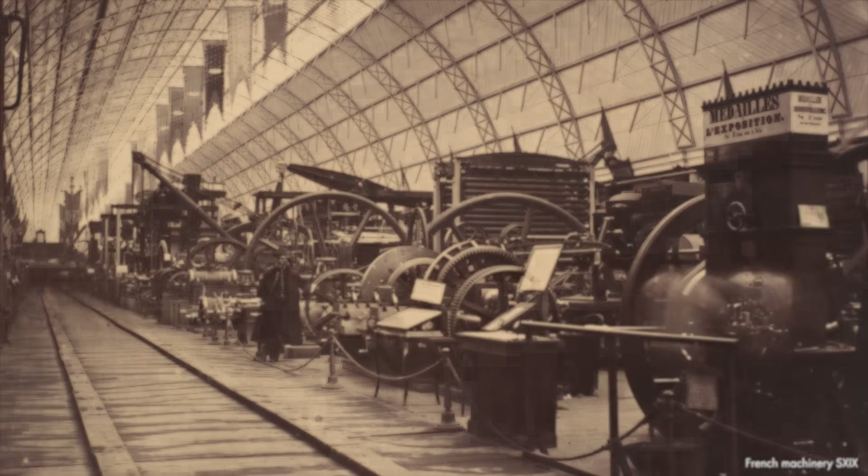And now back to the lost transatlantic steamships. Throughout the majority of history, crossing the Atlantic Ocean was nearly an impossible task, as the Americas seemed to be forever separated from Eurasia. Then, when Europeans developed ships powerful enough to survive the journey, the continents would be bridged. However, trips from one side of the ocean to the other would take an extremely long time and be very dangerous. This would all change with the advent of the Industrial Revolution and the entry into the modern era, where new technologies would pull the continents even closer.

This new time period fostered advancements in many avenues, and one example saw humans harness the power of steam, which was previously thought to be an impossible task, involving abstract concepts such as air vacuums and displaced matter. But soon enough, steam engines were created, and it was only a matter of time before these same engines would be fitted onto ships and sent across the Atlantic.

These new transatlantic steamships reigned king of the ocean from the 19th century all the way up until the Second World War. They also permanently changed the course of history, leaving drastic alterations in trade, immigration, naval warfare, and humanity in general. While the steamships replaced the obsolete sailing ships, soon new technologies came in and replaced the steamships themselves, with advanced aircraft becoming even faster and more efficient.

But in order to get a more holistic view of the impact that transatlantic steamships had on history, I'd like to present you with several prominent examples of individual ships and paint a full picture of their story, and hopefully find out what remains of them today. The first ship we look at is the SS Savannah, which navigated the oceans around 200 years ago.

But on May the 24th, 1819, history would be made as the Savannah set sail for Liverpool, England, looking to be the first steamship to cross the Atlantic Ocean. Success was so unlikely that no passenger or cargo were taken, just the brave, ambitious crew. Then, after 29.5 nerve-wracking days, which saw the crew overcome several technical issues, the Savannah docked in Liverpool, completing the extraordinary journey which very few actually thought was possible.

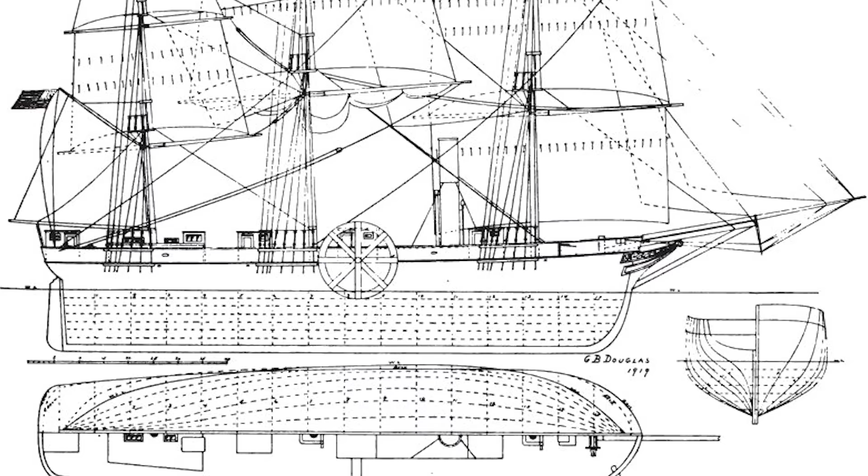Well, unfortunately, in 1821, the Savannah ran aground at Long Island, New York, and broke apart upon impact. Some pieces of the ship have been recovered and restored, but most was lost. Now all that remains are small fragments, such as the canvas from the original sail, as well as the logbook which had the records of its voyages, including that famous trip across the Atlantic to Liverpool.

Now, in 2016, a man from Long Island named Thomas Schultz claimed to have discovered where the remnants of the Savannah lie. By studying the bay and discovering pieces of washed up wood and metal, Schultz concluded that the Savannah is buried underneath the sand.

He has contacted the state about it, but since the bay is federally owned, it's up to the National Park Service to excavate the area, and they have yet to do so, which would suggest that the SS Savannah has very much been lost to time, which is something that Schultz had directly warned authorities about. You see, the tide will wash away sand, pulling the remnants into the ocean, only to be lost forever.

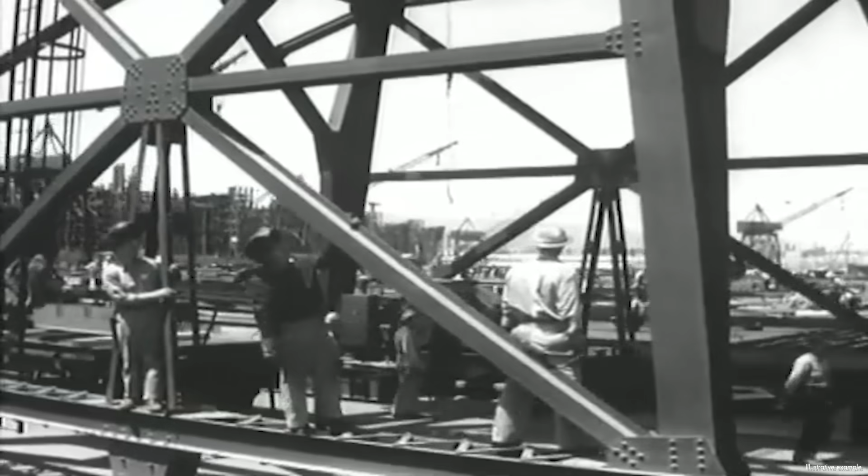After the Savannah proved that transatlantic travel was possible, the shipbuilding technology then gradually adapted to develop newer and faster models. One such example was the SS Great Western. This steamship was designed by Isambard Kingdom Brunel, who was a famous British engineer known for creating a lot of iconic Victorian-era infrastructure. He then decided to venture into shipbuilding, and the Great Western was his first.

Upon completion in 1838, the ship was 1,320 tons, 212 feet long, and could hold up to 148 passengers, far larger than older steamboats. However, the Great Western did use paddle wheels rather than a screw propeller, which was not common just yet. It was also constructed as an ironclad wooden ship and had 4 sails along with its 2 steam engines.

On April the 8th, 1838, the Great Western set out for its first voyage from Bristol, England to New York City in just 15 days, which was nearly twice as fast as the rest of the transatlantic ships at the time, making it the fastest steamship in the world. Over the next 8 years, the Great Western embarked on many trips across the Atlantic, tallying 45 in total.

But in 1853, the Crimean War broke out, with the British Empire siding with France to join on behalf of the Ottomans against Russia, in a conflict that fought over religious rights for citizens in the Ottoman territory. By the first year of the war, the Great Western was repurposed into a troop transport and sent British soldiers across the Mediterranean and Black Sea to Crimea.

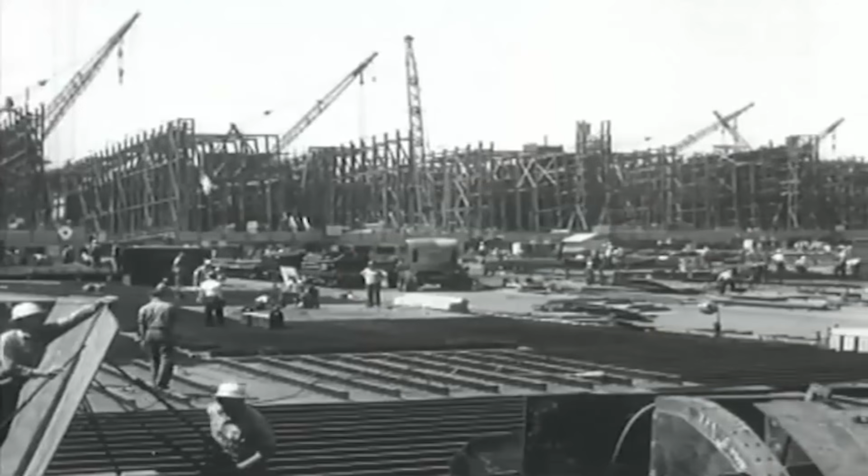As the transatlantic steamship market expanded exponentially, it soon became a competition for who could build the biggest and most daunting ship. Accordingly, in 1840, the British and American Steam Navigation Company finished the SS President, a massive ship that was 2,350 tons, 243 feet long, with a beam of 41 feet, making it the largest ship in the world in the early 1840s. While the ship was immense and beautifully designed from an aesthetic point of view, it seemed as if the engineers put more thought into how to make it as large and visually stunning as possible, instead of making it efficient or safe.

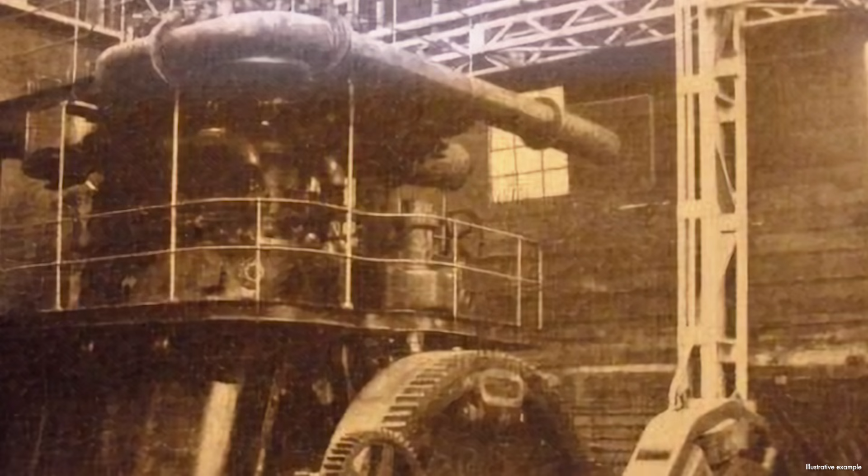And this came at a price. For example, the ship was designed to have 2 decks, but a third, which included a huge salon, was haphazardly added. The President also did not have engines strong enough to carry all of the weight, and the paddle wheels were in constant need of repair. And it gets worse: the ship was often given more cargo than was probably safe, and as a result, slow voyage times were a continuous criticism.

In its first year of service, the President would face a disaster in March of 1841. After boarding a trip from New York to Liverpool, it never arrived at its destination. The disappearance of the President was shocking to the British public, with even Queen Victoria herself taking an interest in the search for the ship. But after months of searching, nothing was found, and it was declared lost. The embarrassment of this catastrophe eventually led to the British and American Steam Navigation Company going out of business.

And here's where things get mysterious. While the official last sighting of the President was when it left port at New York on its way to Liverpool in March of 1841, it's possible that it was spotted in July of 1841 by a Spanish ship returning to Spain from Savannah. The captain identified a ship in the distance which he initially thought was a rock, but after approaching closer, they discovered a wreck and boarded it. The crew figured out that this was a steamship, and with later analysis of their description, it suggested that this wreck may have been the President, given the similar paint coating and number of boilers.

They had realized that this ship had been heavily damaged in a fire, and certain parts of the ship were completely unrecognizable. While they investigated, they were unable to find any surviving items which could definitively identify the ship, such as papers, documents, or letters. So if this wreck was in fact the President, then that means a massive fire saw its demise. What remains of the crew is yet another mystery within itself, most likely a mystery known only to their ghosts.

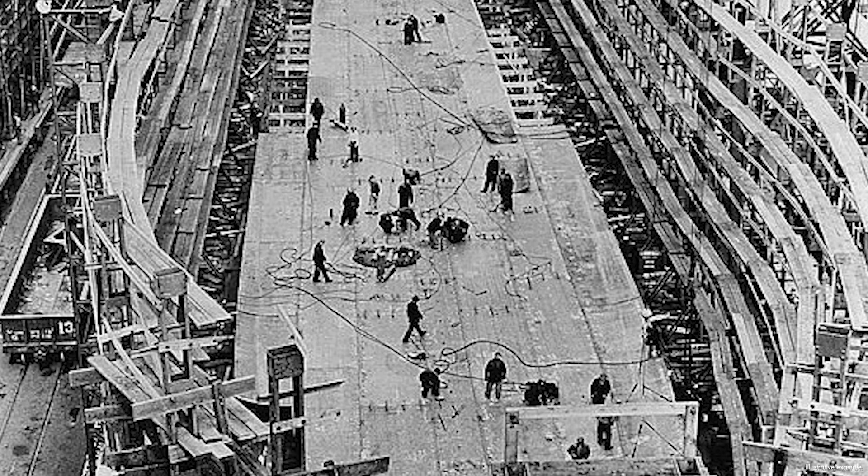Originally, it was planned to serve under the Eastern Steam Navigation Company for travel and trade with India just at the start of British colonization, but it was eventually given to the Great Ship Company before construction was completed. Then, when it was launched, the Great Eastern traveled on the New York line for 6 years, but there were complications. The ship was often too large and inefficient, unable to fit most ports, so ultimately it was sold to the Great Eastern Steamship Company, where it was repurposed into a cable vessel, performing the hard task of laying cables across the Atlantic Ocean.

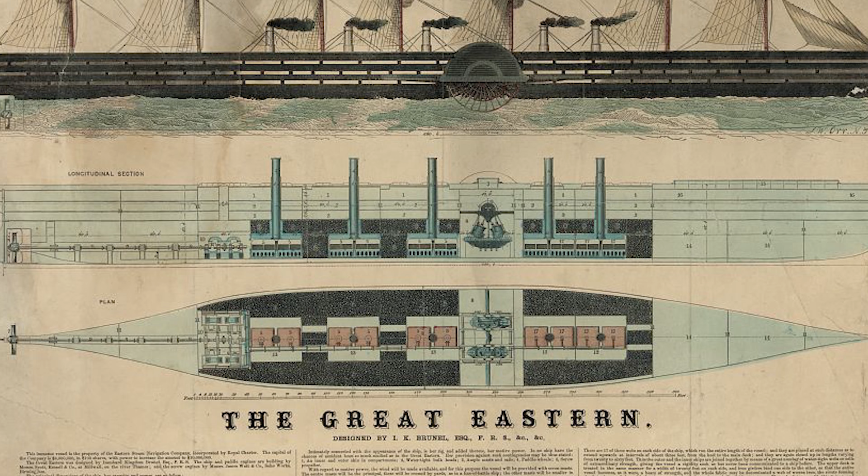The Great Eastern became the first ship to lay a continuous transatlantic telegraph cable. By 1872, though, the Great Eastern became obsolete as specific ships for cable laying were developed, and it was retired. After 12 years of inactivity, the Liverpool department store Lewis bought the ship and turned it into a music hall and coastal billboard. Finally, in 1889, the Great Eastern was sent to the River Mersey, where it was broken up. Given the ship's fantastic size, it took 2 years to disable it completely, and a wrecking ball was required.

But here's the cool part: valuable pieces such as furniture, lights, and lamps were sold to collectors or people who had a personal connection to the ship, like the former crew. While parts of the hull were unable to be recycled, a lot of the wood paneling was turned into a bar, while the deck's caboose was given to a Lancashire school to be used as a playground.

Furthermore, Liverpool FC, the biggest soccer team in the city, purchased the top mast from the Great Eastern and used it as a flagpole outside their famous stadium, where it still stands today.

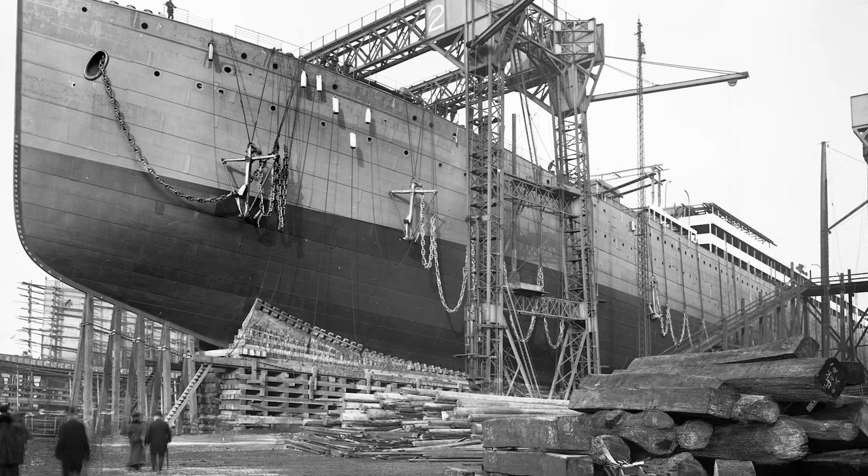As more steamships crossed the Atlantic, production became more refined, reflected by the SS Baltic. Weighing 3,707 tons and measuring 420 feet long by 40 feet wide, the Baltic was originally called the Pacific, and was built in Belfast, UK by the Harland and Wolff shipyard. In 1871, after construction was finished, it was renamed and given to the White Star Line, a brand new company at the time.

The Baltic was known for its state-of-the-art passenger accommodations with high-quality saloons, smoking areas, and sleeping rooms. In September of that year, it made its first voyage across the Atlantic, arriving in New York City from Liverpool. Two years later, she won the Blue Riband for breaking the world record for the fastest trip between Liverpool and Queenstown, Ireland.

In 1888, the Baltic was bought by a Dutch transatlantic company called the Holland America Line, and the ship was renamed the Veendam. Following a decade of transporting European immigrants to America, the Veendam accidentally collided with a wrecked ship in the North Atlantic in 1898, and it sank, but luckily all the passengers were saved.

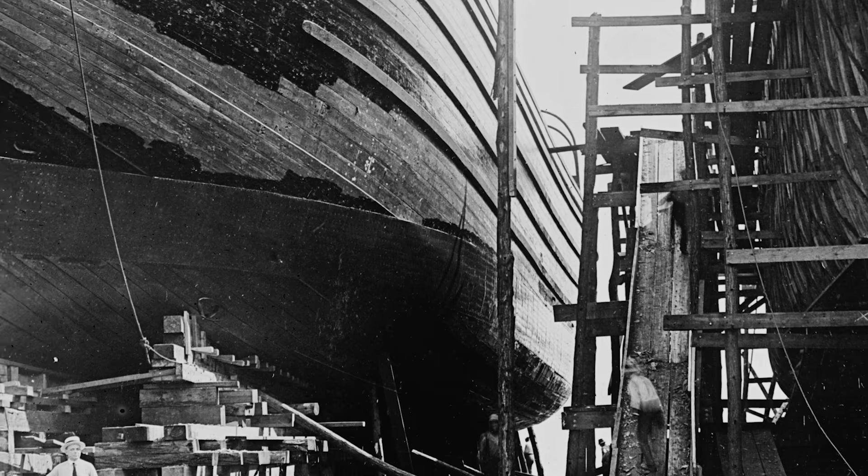This situation is not as unusual as you might think. At a time when wooden ships were still widespread, it was a common danger to come across abandoned and wrecked ships that were not fully submerged in the sea. This was because wood is buoyant, and part of a sunken ship would sometimes remain floating in the water.

To prevent the Baltic from becoming a hazard herself, the crew actually set fire to the ship, and it now sits at the bottom of the North Atlantic.

The SS Adriatic was a sister ship to the SS Baltic, and while they shared many stylistic similarities, they eventually would go on to have very different stories. This ship was also built in Belfast by Harland and Wolff in 1871 before being given to White Star Line. The SS Adriatic was actually built alongside the Baltic.

The Adriatic weighed 3,888 tons and measured 437 feet long by 40 feet wide. Besides the floor and furniture, it was made completely out of iron. It could also hold up to 1,150 passengers, and similar to the Baltic, it had saloons, smoking rooms, and even barbershops. These ships were built following the recent success of White Star's first 4 steamships, when the transatlantic travel market was becoming extremely lucrative.

The Adriatic made its first voyage in April of 1872 from Liverpool to New York City. Through its tenure, she would be caught in multiple accidents, most of which the Adriatic was at fault for. For example, in 1874, the Adriatic slightly grazed the Parthia, but then the next year she collided with the Columbus, a British schooner, causing it to sink.

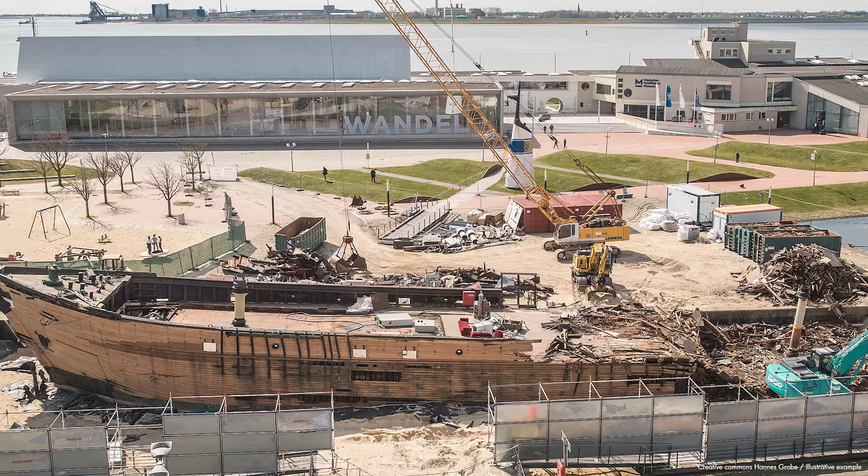But after nearly 3 decades of service, the Adriatic became too obsolete, and in 1899 it was broken up in Preston, England, with its parts being sold for scrap.

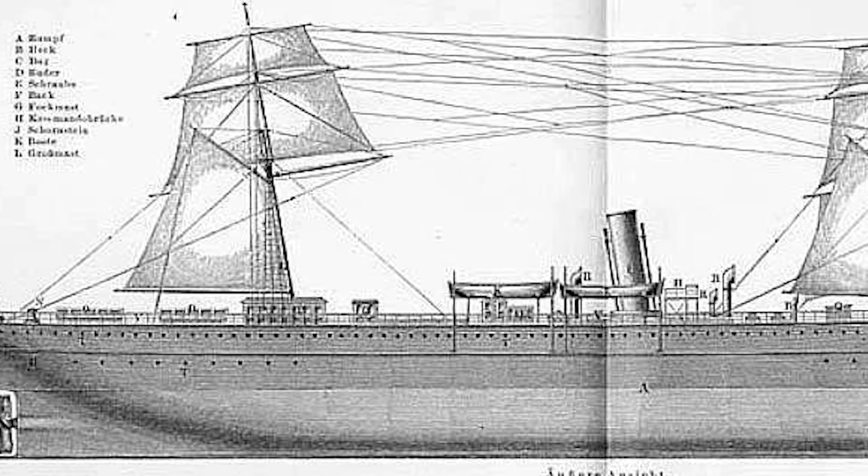The next ship we'll look at is the transatlantic passenger ship titled SS Frisia, originally called the Alsatia. She was built in 1872 by a Scottish shipping company before going to the Hamburg-Havre-New York line. Much larger than older steamboats, this ship was 364 feet long by 40 feet wide and weighed 3,500 tons. It could hold up to 820 passengers, and as steel ship hulls were becoming much more common, the Frisia remained one of the few iron ships still in use at the time.

On August 21st, 1872, the Frisia made its first journey from Hamburg to New York in just 11 days. In these early years of service, the Frisia carried many immigrants from Europe to the USA, especially those fleeing religious persecution, overpopulation, crop failure in their homeland, or just seeking economic opportunities and freedom in the United States.

One such story is from 1876, when 70 Russian immigrants traveled from their hometown in Kratzke to Hamburg, Germany, to board the Frisia. They arrived in New York City before heading to Russell County in Kansas for the valuable farmland. Alongside many German immigrant families, they formed the Bender Hill community, which still stands today.

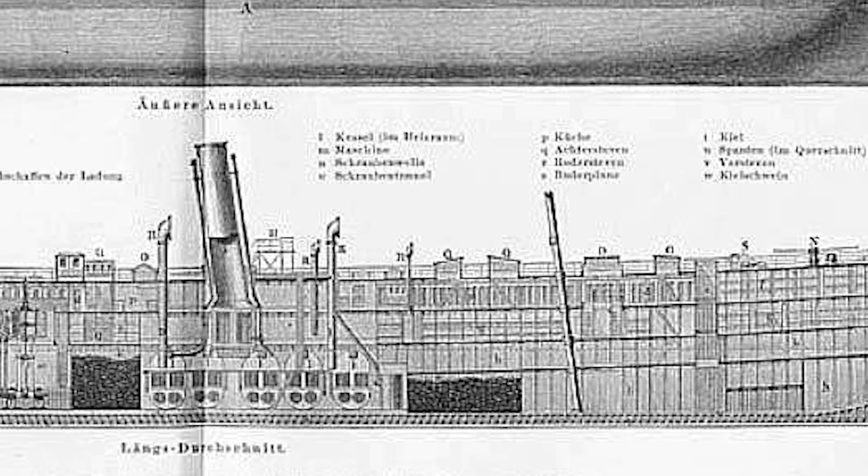After nearly a decade and a half of transporting immigrants to the US, the Frisia was sold to a British company before ultimately being sold to an Italian company only 4 years later. The Frisia was renamed, and under new management, she still operated along transatlantic trade routes, which was natural as she was administered by the NGI, a large Italian shipping company with routes in the Mediterranean.

NGI also sent materials back and forth between Italy and South America. After 12 years of transporting raw materials like coal between Italy and South American nations, she became so old that she could no longer handle transatlantic trade or sea trade of any type. The ship was then coal-hulked, meaning that since it could no longer sail, it was just used to store coal.

Then, in 1902, she was officially scrapped. It's not known what happened to the remnants after scrapping, but one can speculate that its fate was similar to that of the SS Silesia, a ship built by the same firm and operated under the Hamburg American line before running aground. It was then scrapped, and the metal from its hull was sold.

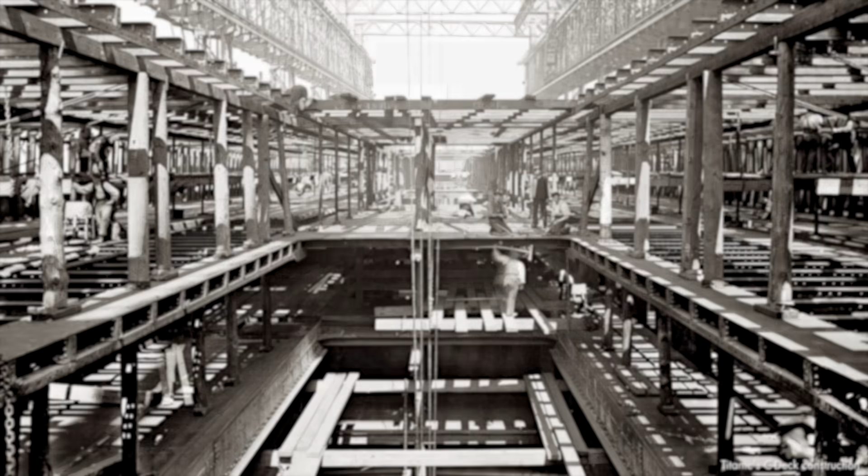The most well-known entry on our list is the Royal Mail ship Titanic, a British transatlantic passenger ship. With construction beginning in 1909 and finishing in 1911, the Titanic was commissioned during the height of popularity for transatlantic passenger trade, with both immigrants and travelers looking to head across the Atlantic Ocean. At the time, the two most successful lines were Cunard and White Star.

Cunard developed two groundbreaking ships, the Mauretania and the Lusitania. In order to keep up with competition, White Star responded with the construction of three ships: the Britannic and the two sister ships, the Olympic and the Titanic.

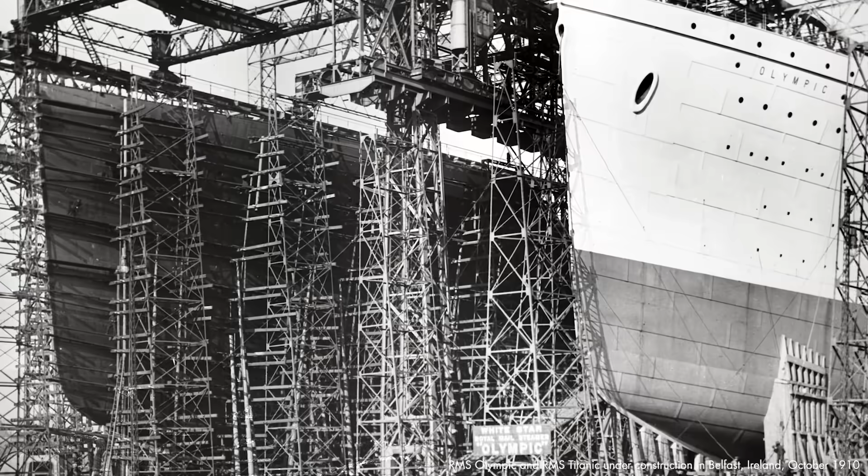The Titanic itself was an architectural masterpiece that contained revolutionary amenities such as elevators, a swimming pool, a massive dining saloon, parlor lounges, and gymnasiums. The general decor of the ship was also simply masterful, with long wooden staircases, statues, and custom finish lining the halls. This ship was pleasant for almost all of its passengers, not just the first class, as the second and third class passengers were given better quarters than other comparable ships at the time.

Overall, the Titanic was also a massive ship, weighing up to 52,000 tons and measuring 882 feet long by 92 feet wide. On April 10th, 1912, almost exactly 110 years ago today, the Titanic set sail on its very first voyage from Southampton, England to New York City. Many prominent passengers were aboard, including socialites, moguls, and even the famous captain of the ship, Edward J. Smith.

4 days later, though, the Titanic traversed an area known for icebergs, but a breakdown in communication and oversight from the radio operators meant that Captain Smith did not know he was heading into a dangerous ice field. The lookouts were unable to spot a massive iceberg in the Titanic's path, and the ship turned too late, with the iceberg scraping the starboard.

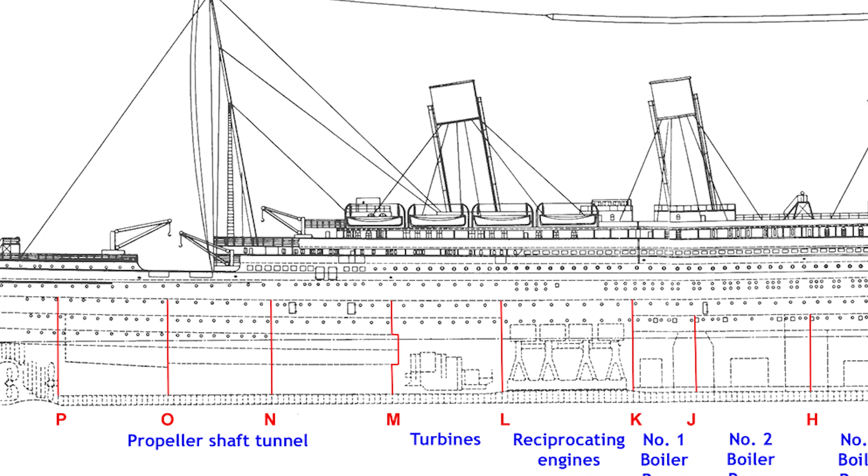Now let me emphasize, this ship was not meant to sink. You see, the Titanic was built as a ship separated into 16 compartments. This was a safety feature intended to prevent sinking if the hull was punctured, as when one compartment filled with water, all the others could be closed off. Because of this, many claimed that the Titanic was unsinkable.

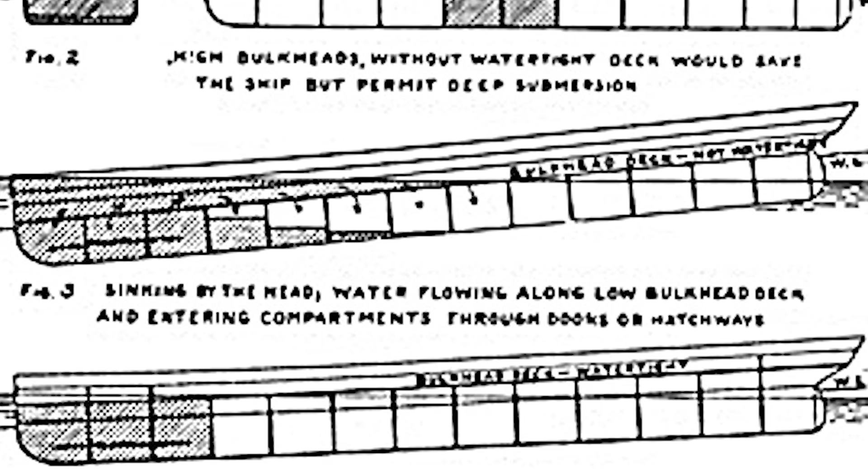However, upon scraping this iceberg, 5 compartments were pierced, and as they all filled with water, the ship tilted, causing water to overflow into the surrounding compartments as well. Immediately, the ship started sinking and distress signals were sent out, but the closest ship was 3 hours away. This, coupled with the fact that the Titanic did not have enough lifeboats, meant that many were doomed.

As the famous James Cameron movie depicted, the situation quickly devolved into chaos, and musicians tried to calm the passengers by playing, but they too would perish. The bow completely filled with water and sank, first causing the stern to emerge out of the water in a seesaw-like action. The weight of the stern was too much to handle, and the entire ship split in two, with both sections turning downwards and plummeting to the ocean floor.

By the time the nearest ship, the Carpathia, came and rescued the survivors, only 705 people lived, and over 1,500 died. The tragedy was heavily publicized due to its truly shocking nature, and multiple investigations were held. The ship remained completely lost at sea until 1985, when an American and French dual expeditionary force operating with the US Navy discovered the ruins of the Titanic using a remote-controlled underwater camera.

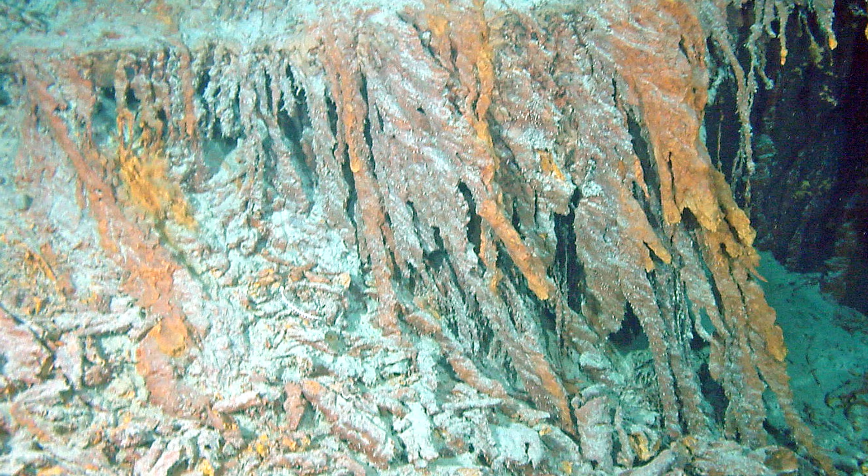They discovered both halves of the ship still laying upright, but now rooted in sand. As recent as 2019, iron-eating microorganisms have done so much damage to the Titanic that it's almost unrecognizable.

Luckily, through many diving trips, numerous smaller artifacts and novelties have been saved, such as menus from the dining saloon, the instruments and sheet music from the musicians who tried to calm the crowd, and even some jewelry left behind by passengers. And while the ocean eats away at the ship little by little each year, the Titanic lives on in the public mind through popular media.

Hailing from the aforementioned Cunard Line, the RMS Lusitania was built from 1904 to 1907, and upon its completion, it was the largest ship in the world, weighing nearly 32,000 tons with a length of 787 feet. She also became world-renowned for her speed, breaking the record for the fastest trip across the Atlantic when she sailed from Liverpool to New York in September of 1907.

However, what the Lusitania is most known for is her sinking during the First World War. In May of 1915, during the second year of the Great War, the Lusitania was heading back to Liverpool amid ongoing naval warfare. Earlier that year, Germany had declared the seas around the UK a war zone and sunk any ships in these waters, no matter the type of ship or who was aboard. These atrocities were committed with their deadly fleet of U-boats. The policy was dubbed unrestricted submarine warfare, and it was devastating to Great Britain.

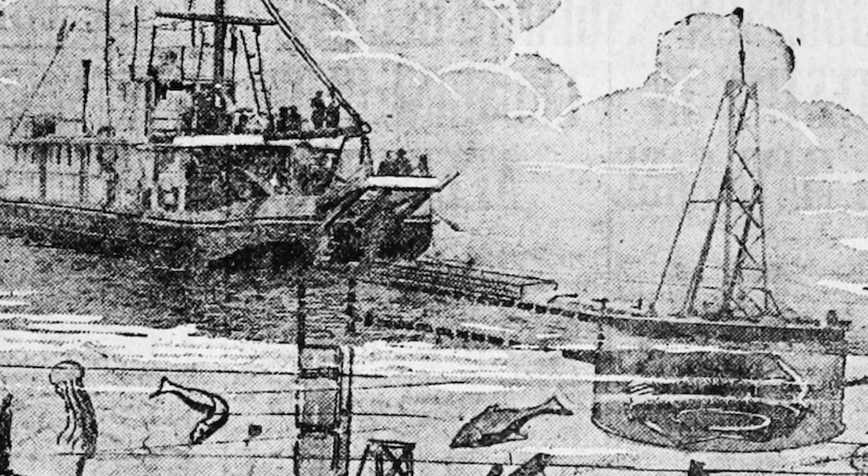After the war, the Lusitania remained at the bottom of the ocean from 1931 to 1935. A diver team led by a man named Simon Lake salvaged what he could from the Lusitania, but it was extremely difficult and little progress was made.

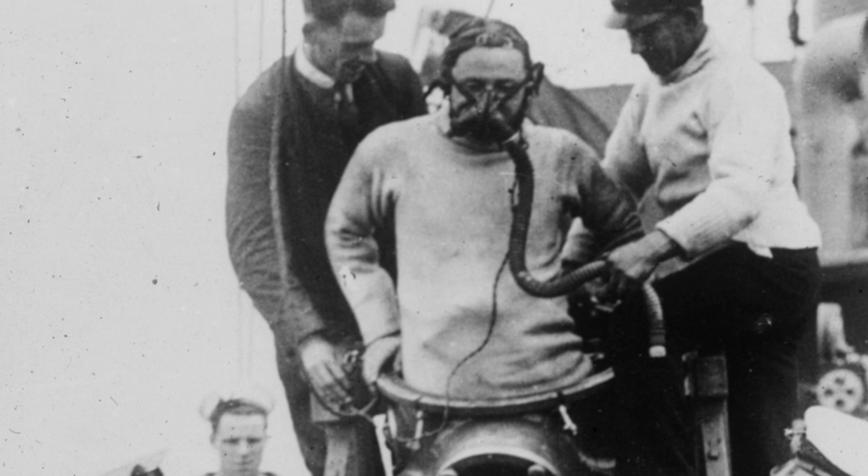In 1967, U.S. Navy divers John Light and Greg Bemis purchased the Lusitania, but constant court proceedings and disagreements with the British government meant that the Lusitania was not able to be explored again until 2007. But once they had permission, numerous divers were able to study the wreckage.

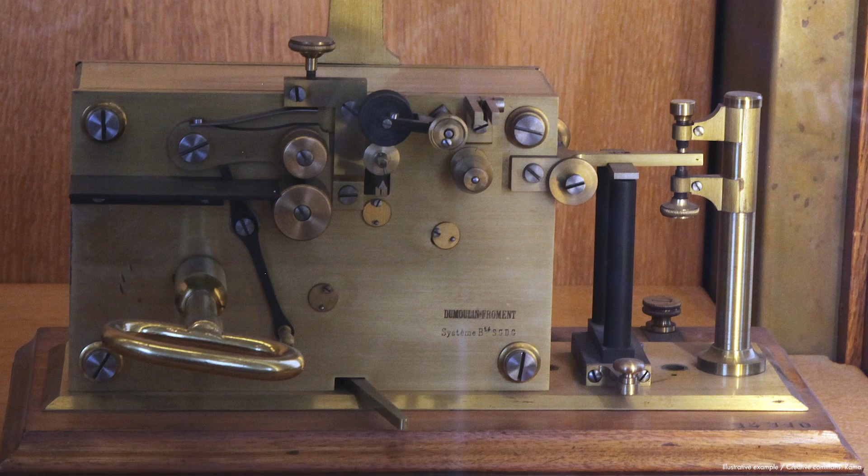It was here that millions of rounds of rifle ammunition as well as artillery shells were found, which ultimately proved the validity of the German claims. More interesting things were uncovered as well, such as dinner sets, a telegraph machine, several of the brass propellers, and anchors, among others. Unfortunately, even with more advanced technology, the current diving teams run into the same issues that Simon Lake ran into almost 90 years ago.

The Lusitania sits 300 feet below water, where there's no natural light. Another issue is that the ship slowly sinks deeper and deeper each year. This makes exploration of the site tremendously tough, and as a result, there remains a vast array of artifacts still in the ship or the surrounding area.

By the 1930s, the powerful British shipping companies White Star and Cunard merged to form one conglomerate. They built two new liners, the RMS Queen Elizabeth and its sister ship, the RMS Queen Mary.

The Queen Elizabeth was the newer and bigger of the two ships, and for a period of time, it was the largest passenger liner in the world, measuring in at 1,000 feet long, 118 feet wide, and weighing 84,000 tons.

However, construction of the Queen Elizabeth was unable to be finished in 1939 with the outbreak of the Second World War, and both the Queen Elizabeth and the Queen Mary were repurposed to assist the war effort. Construction was sparsely resumed when possible during the war, but the ship's importance meant that it had to be protected from German spies. In fact, in order to avoid German sabotage or theft of information, the Queen Elizabeth was secretly transported to the US, which was a neutral nation at that point of the war.